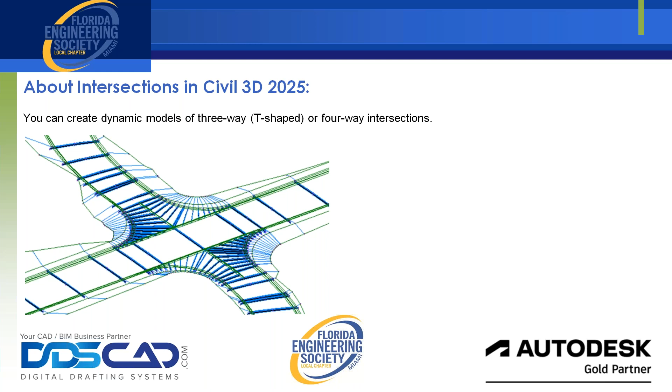Today we're going to be talking about creating intersections in Civil 3D 2025. In Civil 3D, you can create dynamic models of 3-way T-shaped or 4-way intersections. In the simplest form, an intersection is created by selecting the location where 2 alignments intersect. It creates an intersection object in the drawing, and this intersection object is displayed in the Prospector tab of your Toolspace.

Another approach to creating intersections is to first create your roadway alignments, then your offset alignments, and then the associated profiles. Once these preliminary design items are in place, you can create an intersection object that utilizes the 3D aspects of these roadway design geometry components.

Intersections are created and are based on existing Autodesk Civil 3D objects, which include your alignments, the horizontal piece. That's used by the intersection to define the center lines of the 2 roads that intersect. There are 3 types of alignments that we can use: centerline alignments, offset alignments, and curb return alignments. The centerline and offset alignments are used to define the horizontal geometry of our intersection object.

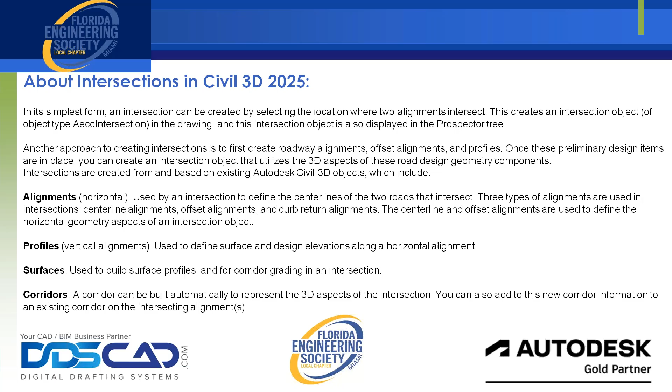Our profiles, which are our vertical alignments, are used to define the surface and the elevations along the horizontal alignment. Surfaces are used to build the surface profiles and then are used for the corridor grading of the intersection. And then corridors: a corridor can be built to represent the 3D aspects of the intersection. You can either build this corridor as an individual object, or you can add it to an existing corridor that may already exist in your drawing.

Now, assemblies. The roadway assemblies are required to build that corridor. You can build the assemblies ahead of time, and you have to build these assemblies based upon parameters that the intersection wizard we're going to be using today requires. Once you have built those assemblies and applied them, you can also save them and build something called an assembly set, so you can use those predefined assemblies over and over again in other drawings.

Both the assembly sets and the assemblies, of course, are made from the subassemblies that are part of the Civil 3D application, which you put together to define the geometry of the corridor section.

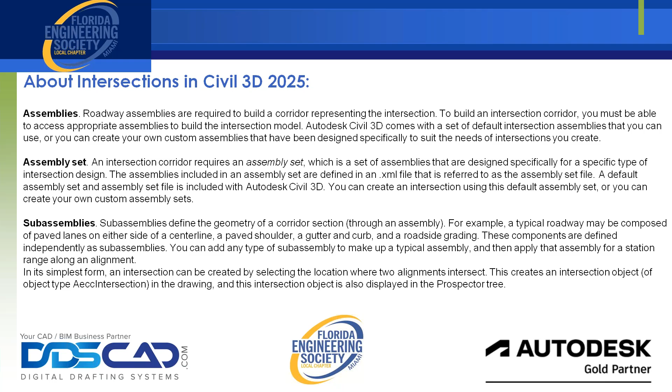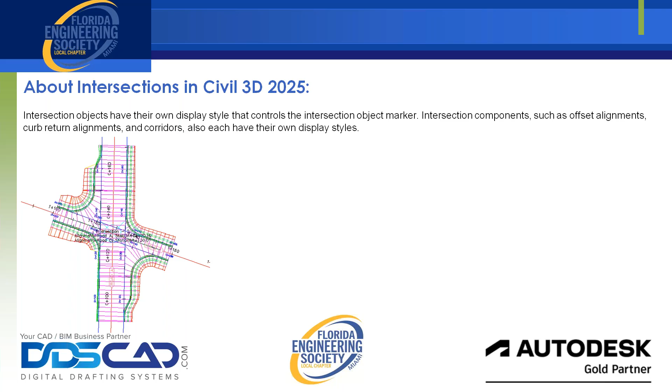Intersection objects have their own display styles that control the intersection object marker and the intersection components, such as your offset alignments, your curb return alignments, and the corridors. And they all have their own display styles. If we know anything about Civil 3D, everything in Civil 3D has a display style that controls how it looks in the drawing.

Now, intersecting alignments collection in the Prospector tab. After you create an intersection, in the Prospector tab you're going to have a section called intersection alignments. You can expand that out and see what alignments were used to create the intersection. You also can select an alignment, right-click, and use this command here

called Explore in Prospector. That command is just a shortcut. When you pick it, it takes you back up to the alignments collection in your Prospector tab underneath your Toolspace. Then you can make whatever changes you want to that particular alignment. So it's just a tool that helps you go from one place to another in your Prospector tab in your Toolspace.

Now, once you create an intersection, it's a new Civil 3D object. In the Prospector tab there's now going to be an intersection collection, so you go to that collection to access the intersection objects in the drawing. As intersection objects are created, they are displayed in the intersection collection.

When you expand that collection, you can view the names of the intersection objects in the drawing, and when you expand it again, you can display the intersecting alignments collection, or the intersection quadrant collection. Either of these collections can be used to display a tabular list of the components in the Prospector list view. If you remember, in the Prospector tab, when you pick on something, in the lower left-hand corner there's the Prospector list view that shows different things under that particular collection.

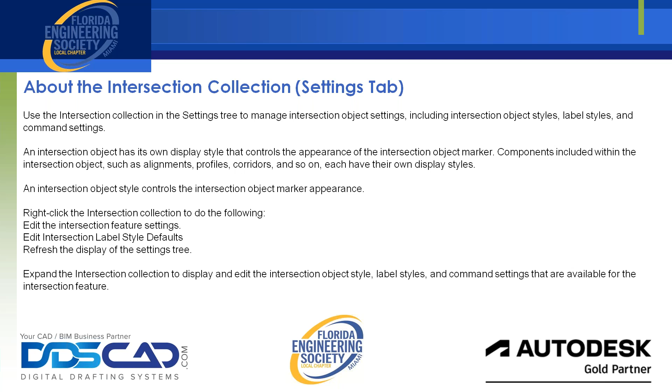If you right-click on the intersection collection, you can edit the intersection feature settings, or you can edit the intersection label style defaults. This is very similar to how all the other collections work. You always can get into feature or label style settings, and you can also always refresh the display style. It's just a new collection in your Settings tab.

Now, the intersection quadrants collection in the Prospector tab. We use the intersection quadrants collection to access details about the quadrants that are created when we create the intersections contained in the intersection object. We expand that out to view the names of the quadrants included in the intersection. If it's a T intersection, it's going to have 2 quadrants. If it's a 4-way intersection, it's going to have 4 quadrants.

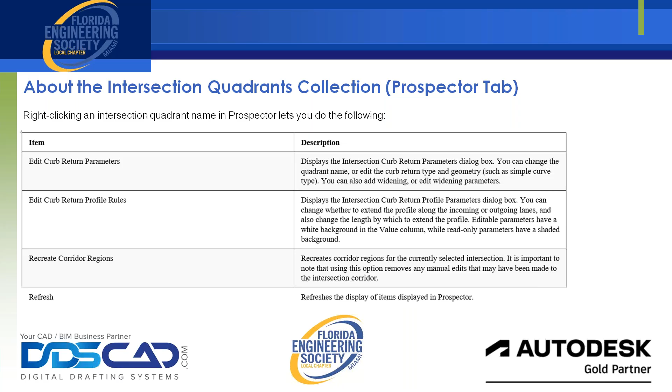This collection displays the names of the curb return alignments in each quadrant. You also can use it to display the names of the incoming and outgoing lane centerlines in the Prospector list view. The list view also displays the value of the intersecting angle between the incoming and outgoing lane centerlines. When you right-click on a quadrant name, you can edit the curb returns, edit the curb return profiles, recreate the corridor regions, or refresh the list.

Now, a couple quick things about deleting intersections. You can delete an intersection object by erasing it from the drawing, which removes it from the intersection collection in the Prospector. When you delete an intersection object, the following things are deleted: the intersection object and its label are removed from the drawing, and the intersection is removed from the intersection collection in the Prospector.

The following components associated with the intersection object are not deleted when you delete the intersection object: the 2D geometry components, which could be the intersection alignments, the offset alignments, and the curb return alignments, and the other associated components, the offset profiles and the curb return profiles.

If you create a new corridor object inside that intersection area when you create that intersection, this corridor object is not deleted when you delete the intersection object from the drawing. You just have to go back and delete the corridor object manually if you want to delete it.

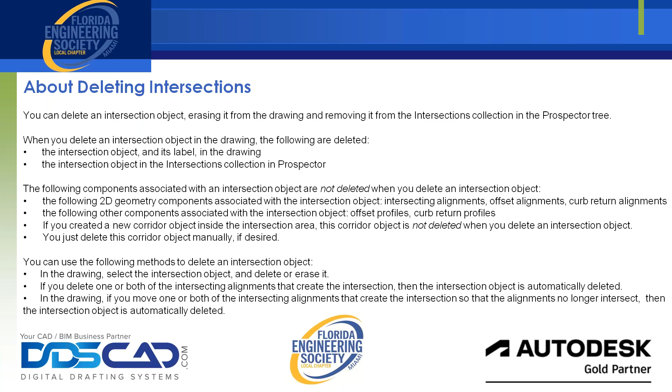You can also use the following methods to delete an intersection object. In the drawing, you select the intersection object and delete it or erase it. If you delete one or both of the intersecting alignments that create the intersection, then that intersection object is automatically deleted. In the drawing, if you move one or both of the intersecting alignments that create the intersection so the alignments no longer intersect, then the intersection object is automatically deleted. These are things that are very important when you're working with intersections after you create them.

Okay. Now, also deleting intersection object dependent components. What happens when you do those? Centerline profiles. If any of the centerline profiles associated with the intersection are deleted, then the curb returns become static. That means they're no longer dynamic and they won't update if you move things around. Accordingly, the intersection corridors will be updated.

Now, the offset alignments. If an offset alignment associated with the intersection object is deleted, that offset alignment has a curb return alignment attached to it. The curb return alignment attached to that offset alignment is not deleted. However, the curb return alignment is no longer dynamic to the intersection object. It becomes static, meaning if you make an update or move it, it will not dynamically update.

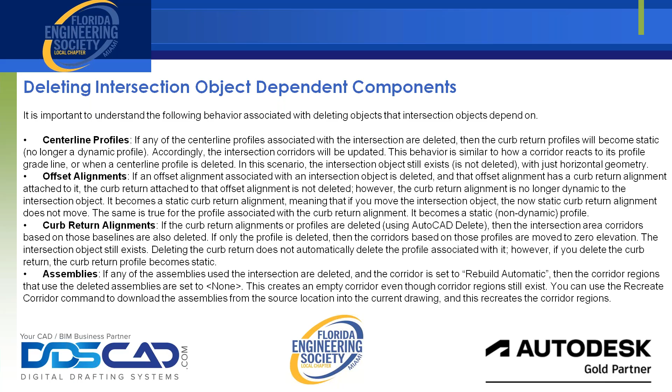Your assemblies. If any of the assemblies that are used in the intersection are deleted and the corridor is set to rebuild automatic, then the corridor regions that use the deleted assemblies are set to none. This creates an empty corridor, even though the corridor regions still exist in the drawing. Then you can go back and use a command called recreate corridor to download the assemblies or pick the assemblies from the existing drawing and rebuild that corridor region. And we'll go through one of those here in a little bit.

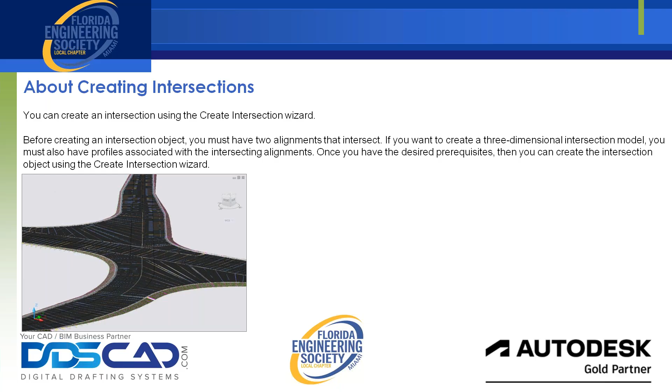All right. So now, creating an intersection. You can create an intersection using the Create Intersection Wizard. Before creating an intersection object, you have to have two alignments that intersect. If you want to create a three-dimensional intersection model, you must also have the profiles associated with the intersecting alignments. Once you have the desired prerequisites, you can create the intersection using the Create Intersection Wizard. You know how Autodesk is, they love their wizards.

Now, to create a simple 2D intersection: when an intersection object is created, a variety of tasks can be performed automatically, including the following. It will create your offset alignments for the roads included in the intersection. It'll create the curb return alignments in the intersection. It'll create the profiles for the offset alignments and the curb return alignments that were created when the intersection was created.

Now, there's a note. An exception to this is that if you set predefined static alignments as offsets, it's expected you have to specify the profiles. No dynamic offset profiles will be created. So that's a little rule. Or creating a new corridor region from the existing corridor in the intersection area, or creating new corridor objects in the intersection area. Now, what it does is it locks the profile elevations of the secondary road to the main road, which we call the primary road profile. Some of the tasks are optional. They depend on the options that we select in the Create Intersection Wizard.

The simplest way to create a basic two-dimensional object is to start with two alignments that intersect each other only once. You cannot use the Create Intersection Wizard if the alignments do not intersect. If your drawing has two intersecting alignments that meet this criteria, you can then create a basic 2D intersection using the Create Intersection Wizard. You simply start the command, follow the prompts, and accept the default choices. And we'll be going through all that in just a few minutes.

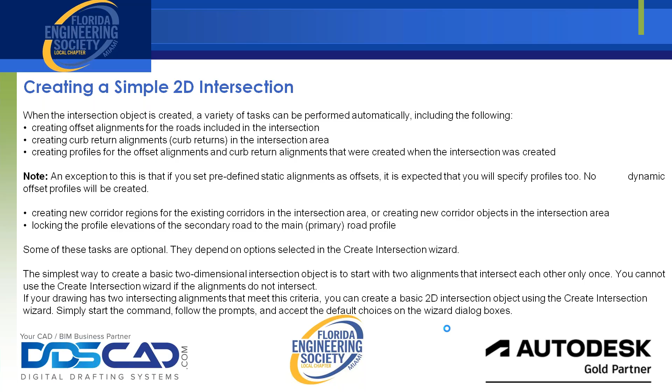All right. Now, creating a 3D intersection with corridor objects with alignments and profiles. To create a 3D intersection that includes a corridor, you first need to create your road geometry, your center lines and your alignments, your profiles, and an existing ground surface in your drawing. Once you have those, you can proceed with the Create Intersection Wizard tool. All right.

The wizard prompts you to select the location in the drawing where the two road center lines intersect. Okay. Now, you can start with the following data combinations: two intersecting center line alignments, or two intersecting center alignments with one or more road edge offset alignments, or their profiles. You can have the profiles defined already or not.

If the profiles are not available, then the features that are associated with the 3D model will not be available in the wizard. So in other words, if you don't have certain conditions, certain things won't show up in the wizard. Okay. Now, with any of the scenarios we've just described, you can start the Create Intersection command, select the point where the center lines intersect, and then proceed with creating an intersection, using the wizard.

Now, when you've got the wizard running, basically the first screen that you come to is going to tell you your road alignments. So it says that if you're creating a T-shaped intersection, which is a three-way, then the alignment that passes through the intersection completely is automatically specified as the primary road. All right. So in this situation, the primary road is going to be set to have a value of 1, and you're not prompted to specify which road is the primary road because it happens automatically. And this becomes important when we get into creating a different type of intersection.

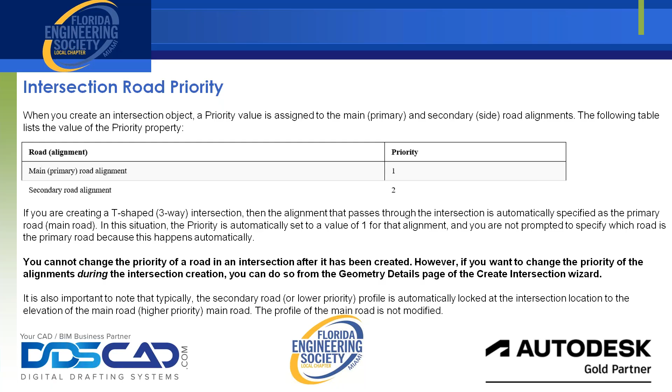Okay. Now, you cannot change the priority of a road of an intersection after it's been created. However, if you want to change the priority of the alignments during the intersection creation, you can do it from the geometry details page. Now, I don't know if I've ever done that before, and I don't think I've ever had anybody call me, but they say that you can do it. It is also important to note that typically the secondary road profile is automatically locked at the intersection location to the elevation of the main road. Okay, so the profile of the main road is not modified.

All right, intersection grading options. All right, you have two options in here. So the intersection corridor type property determines the type of grading that will be applied to the intersections. We have two types: primary road crown maintained, or all crowns maintained. And you've got to specify one or the other when you're creating your intersection. Okay, and it's going to be in the general page of the intersection wizard. All right, for an existing intersection, the intersection corridor type is displayed on the intersection details of the intersection properties box. Okay, in the intersection quadrant section.

Okay, now once this intersection is created, you cannot change the value of the intersection corridor type. If you want to change this option after you've created the intersection, you've got to delete the intersection object and then create a new one with the desired intersection corridor type. And that's why I went through the deletion part first.

Now, this is a little graphic. So in this type of intersection, we're doing a primary road crown maintained. All right. The crown of the primary road is maintained while the crown profile of the secondary road is adjusted to match the edge of the primary road and the intersection point. Okay. The crown profile and edges of the primary road are not affected. When you pick on this, the little graphic in the wizard is going to show like you're seeing right here.

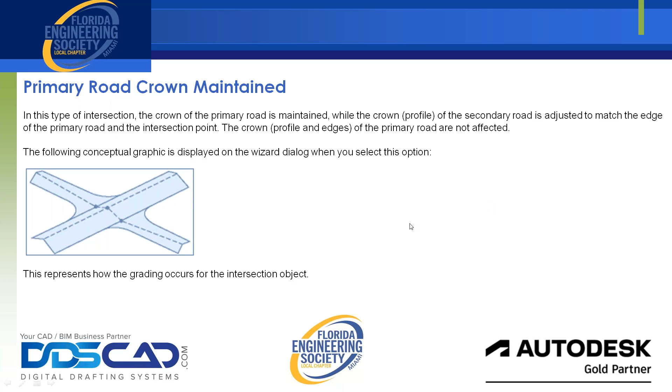All right. Now, a couple things to consider when you create an intersection. It's important to understand the following before you begin creating your first intersection. Use the Create Intersection wizard. You can create an intersection object that contains up to 4 quadrants. If the default intersection assembly mapping and the target assembly does not meet your design requirements, you create an intersection using these components and then edit the intersection regions manually to satisfy your design requirements.

Just like creating a corridor model. If you're creating a corridor model, you can go back into the corridor properties and change the values of the different things that you're using. If you create an intersection and then manually edit the intersection corridor regions, the changes will be overwritten if the intersection is regenerated by using the Regenerate Corridor Regions tool or by rebuilding the intersection. That's an important thing. If you make changes and you rebuild it or you recreate it, those changes are going to be lost. And we're going to do an example of that, the last thing we do today.

When creating an intersection, targeting both horizontally and vertically is done for you automatically. If you want to change the targets, you must manually modify the intersection corridor regions using the corridor properties dialog box.

So typically, after an intersection is created, the following objects are automatically added to the current drawing: your intersection object, a corridor if you selected it to do that, an assembly, your sub-assemblies, your offset alignments, any curb return alignments. However, the assemblies, the sub-assemblies, the corridors, the profiles are only added if the appropriate options are selected. Now, we're talking about assemblies being added. That's if you're using something that we're going to talk about here in a minute called an assembly set.

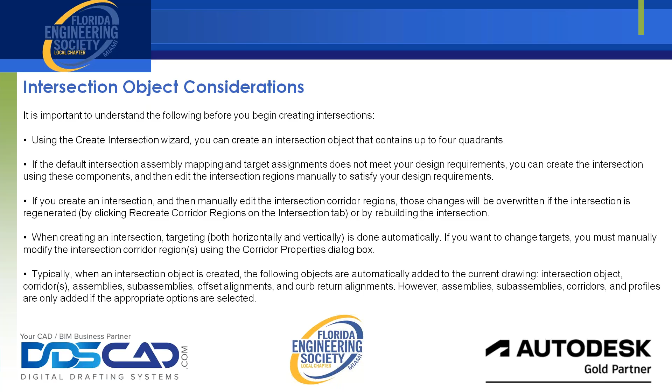So to create an intersection, we go to the Home tab. Then we go to the Create Design panel and we pick on Intersections and we pick on Create Intersection. The first thing it's going to do is ask you to select a point where the intersection happens. Now, if you wish to create a three-way intersection, it's important that the alignments meet precisely. They do not overlap, and they don't undershoot.

If the two alignments overlap, then it's by default going to create a four-way intersection. If you're creating a four-way intersection, you're going to be prompted to select the alignment that's going to be defined as a primary road, and you just pick it in the drawing. If you're creating a T-shaped, then the alignment that passes through that intersection is automatically specified as the primary road. Now, on the General page of the wizard, you can enter a name for the intersection object, or you accept the default. You can also add a description, or you can change the defaults for the marker style, the layer, and the labels.

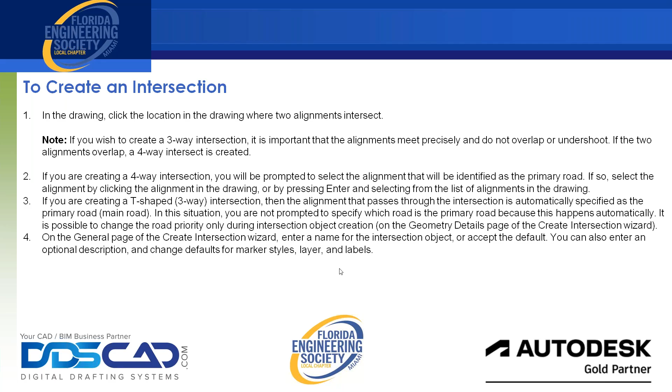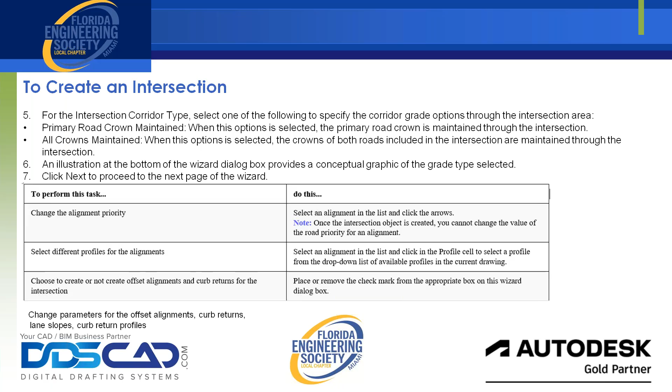Now, for the intersection corridor type, you've got to select either primary road crown maintained or all crowns maintained. Then you also have some other things that you can do in there. You can basically tell it to create or not to create offset or curb returns. And you can also go in and change the parameters for your offset alignments, your curb returns, your lane slopes, and your curb return profiles. And we're going to do all this in just a couple minutes. Then you hit Next, and by default, the new offset alignments are going to be created. So we click Next to proceed to the next page in the wizard.

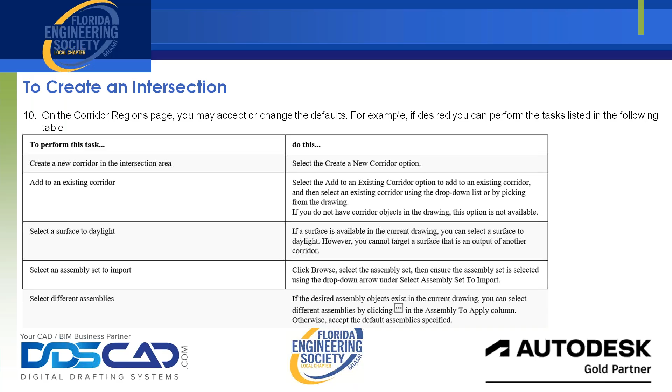Then we get to the page that says, how do you want to create this intersection? Do you want to create a new corridor in the intersection area? If you do, you have to check a box to do that. Then it's going to ask you, do you want to create a new corridor, or do you want to add it to an existing corridor? And then it's going to ask you for the surface to daylight, because remember, that's one of the requirements to use the intersection wizard. Then we're going to select an assembly to import, and that could be an assembly that's already existing in the drawing, or we can select an assembly set to import. And we'll do all this in just a couple of minutes. Once you've got everything applied correctly, you hit Create Intersection, and your intersection is now created. So we're going to start out here by creating something called a peer road intersection.

So we're going to create a three-way intersection and generate a corridor that maintains the crowns of both roads. To create a complete intersection model, we have to have a centerline alignment and a profile for each of the intersecting roads. Both the horizontal and vertical geometry for the remaining elements, including the offsets and the curve returns, are going to be generated by the parameters that we specify. So in a peer road intersection, the crowns of all the intersecting roads are held at a common grade. The pavement for both roads is blended into the curb return region, which forms the transitions between the intersecting roads.

So the drawing that we're going to work with contains a corridor along each of the intersecting roads. Each corridor is made up of a corridor assembly and a corridor centerline. Now, at the end of this example, we're going to have created a new intersection object, two curb return alignments and their profiles, four offset alignments and their profiles, several new corridor regions, and some corridor assemblies for each region of that intersection.

So let's jump over to Civil 3D. So here's our first example. Well, that was all right. Now, first off, I'm going to go over here in my Prospector tab, my tool space, and I'm going to expand out my alignment, and you're going to see that I have 2 alignments. So I'm going to select on First Street, and I'm going to say select. So this area over here is for my First Street alignment.

All right. I'm going to select my Second Street alignment. There's my Second Street alignment. Now, if I expand out First Street, you'll see that I have my design profiles created, and the same thing for Second Street. I should have my design profiles. So that means I've got some of the conditions met. I've got my alignments and I've got my profiles.

Okay. Now, if I slide down in here and I look under my corridors, you'll see that I have 2 corridors, First Street and Second Street. So I pick on my First Street corridor and hit select. You'll see that there's my First Street corridor. If I go down here and pick on Second Street, you'll see that here's where my Second Street corridor is located. All right. So I have some existing corridors in the drawing.

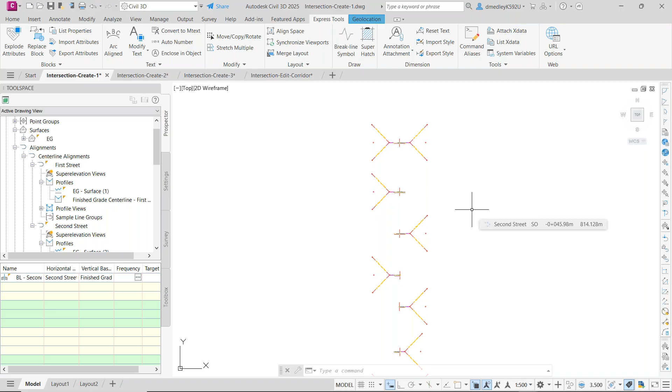And if I go up here and I look at my surface, you'll see that I have a surface in the drawing. And it's currently not displayed, but I do have a surface available. Now, if I pan over, you'll see that I have some assemblies that have already been built in the drawing. And I can elect to use those or not to use them. And each one of these assemblies is going to match a condition that's required by the intersection wizard. Okay. And then you'll see that I have 2 profile views with, again, my associated profiles.

Now, I'm going to zoom in here. Now, here's a little tip about when you're working with the intersection wizard. The intersection wizard can be a little finicky sometimes. And sometimes when you go to select where your intersection is going to be, it can't find that intersection. And so what I tell people to start out with is go down to their status bar and make sure that you don't have your running OSNAP turned on. And I'm going to turn, for this example, my dynamic input.

Now, what I'm going to do is I'm going to select on these 2 alignments. Okay, and I'm going to right click and I'm going to pick on the display order and I'm going to bring them to the front, bring them all to the top of the display list, and that just helps the intersection wizard select that intersection. Okay, so let's get started. Home tab, create design, intersection, create an intersection.

And you notice now that even though I had my running OSNAP turned off, the software turns on my intersection snap, and I'm going to zoom in and pull right into here, find that intersection. And if it finds the intersection, when I pick with my left mouse button, it will bring up the create intersection dialog box, which again is made up of general, geometry, pages, and corridor regions. Okay, so to start out, the intersection name, we're going to use the default parameters. So it's going to be called, in our case, primary alignment name, secondary alignment names.

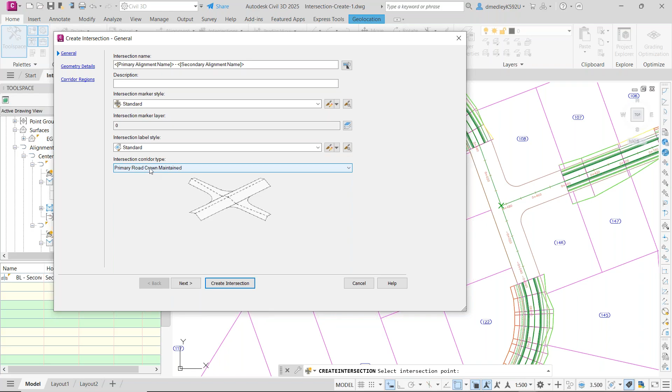My primary alignment was going to be, because this alignment went all the way through the intersection, so it's going to be 2nd Street dash 1st Street. And I'm going to leave my intersection marker, layer, and label style as the defaults. And my intersection corridor type, you can see right now it's set at primary road crown maintained. And you see the graphic. I'm going to change that to all crowns maintained. Okay, you see the graphics change. I'm going to hit next.

All right, now you'll see up here at the top, it tells me the priorities of the 2 alignments. Okay, now offset and curb returns and offset and curb return profiles. I want to have these 3 boxes checked so it creates and allows me to specify my offset alignments. It creates my curb return alignments, and it creates my offset and curb return profiles. So we're going to start out by going to the offset parameters first.

All right, so for this example, our primary road, all right, when I select, it's highlighted, and so the offset value is 3.5 meters for both the left and the right side. And this data set is a metric data set that I'm using today.

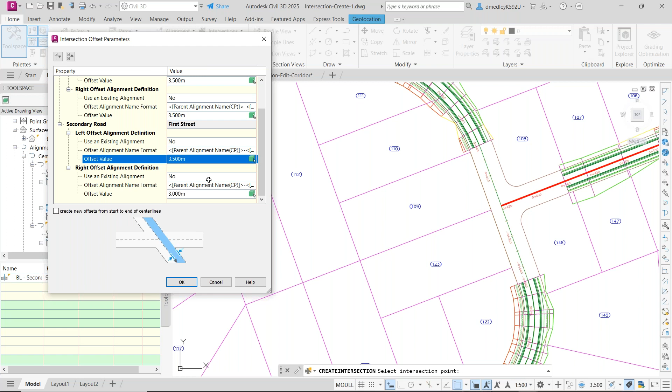Okay, so what I'm going to do is I'm going to change the offset value for my secondary roads. So I'm going to change the offset value for the left side to 3.5, and I'm going to change the offset value for the right side. And as you notice, as I check in the box, my graphic changes to show me what side of the road that I'm working on. Okay, so I've set my offset value for my offset this is going to create. So I'm going to hit OK.

Now I'm going to go to my curve return parameters. Okay, now in this example, because it's a T intersection, I'm going to have 2 quadrants, my northeastern quadrant, and I'm going to have my southeastern quadrant. So what I'm going to do is I'm going to change the radius for my northeastern quadrant to 7.5. Okay, now I could hit next and go down here and change that value again.

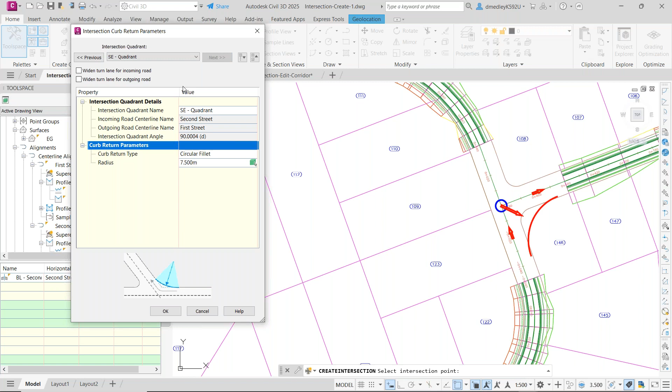But here's a little tip. I'm going to go back to previous, and I'm going to select on the curve return parameters. And just like any good command in Civil 3D, and everybody that I teach learns this one phrase: when in doubt, right click. So I'm going to right click, and I'm going to say copy these to all quadrants. So that value is now copied to the southeastern quadrant. Right. So that's all I'm going to do. I'm just going to change the radius for those 2 quadrants.

Okay. All right, now I'm going to go down and look at my lane slope parameters. So for both the primary road and the secondary road, I'm just going to do a crossfall across the center line of minus 2%. I'm going to leave the defaults. Okay, and then for my curve return profiles parameters, when I look at that, I'm going to leave the defaults. But what we're really looking at right here is that we've got a length to extend along the incoming lane.

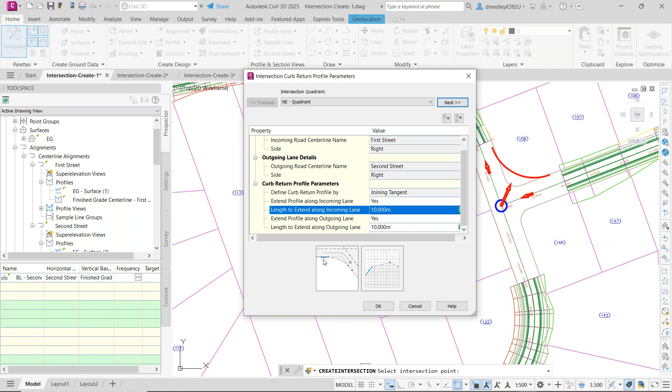So my incoming lane coming in is going to be this area right here. It's going to be 10 meters, and my length to extend my outgoing lane, my default is set at 10 meters. Okay, for both quadrants. So I'm going to set that as okay. All right, now I'm going to hit next. All right, so now this brings us to where things happen.

So first off, in the corridor regions page, create corridors in the intersection area. All right, now my option is, do I want to create a corridor? If I uncheck that, it's going to create the intersection and the intersection object, but it's not going to create a corridor. For this example, I want to create a corridor, but I want to add it to an existing corridor. So I'm going to change to add to existing corridor.

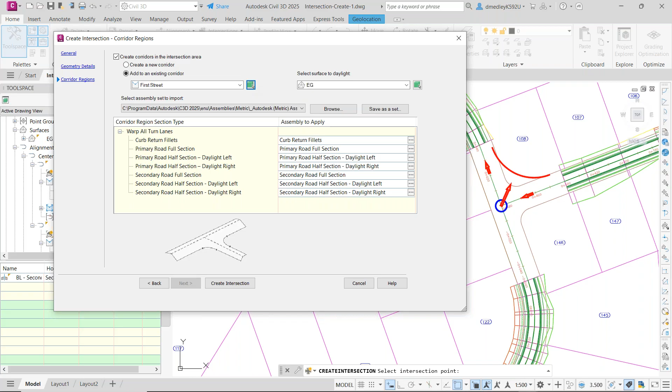Now, I can pick from the list, or I can pick the graphic, this little icon right here. When I do that, I'm just going to go over and pick on that First Street corridor, and that'll select it as my corridor. So either I can pick it from the list or I can pick it from the screen. Because my surface isn't displayed, I have to pick it from the list.

Now, down here under the corridor region type, basically you've got different parameters that have to be. Your corridor, your curve return fillets, your primary road section. As I move through, you see the graphics change to tell me what we've got. Daylight right, full section for the secondary road, full section daylight right. And over here on this side, these are the assemblies. Now, right now in this drawing, I have some assemblies.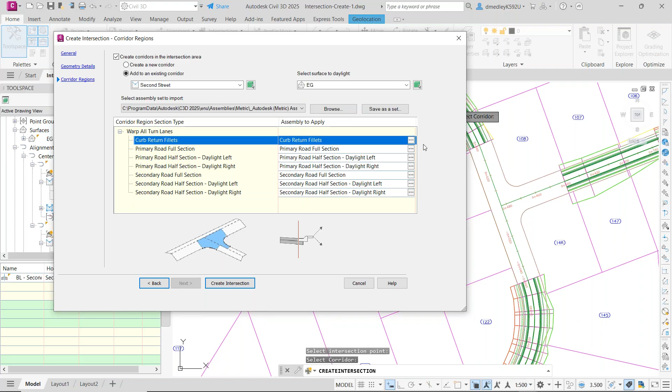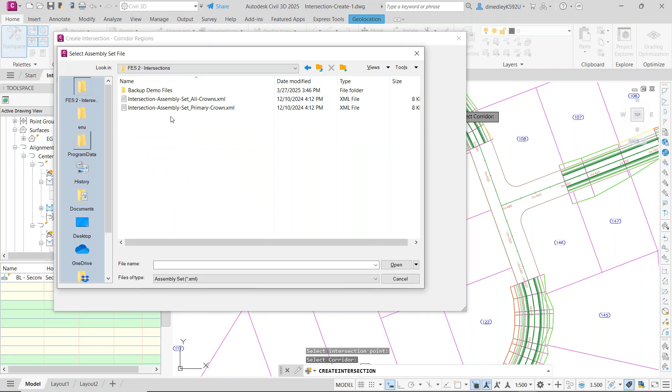So if I pick on the little box here under the curb return fillets, I pick here, and I pick the down arrow, I can pick from any assembly that I have in the drawing already, all right? But now for this example, I don't want to do that. I want to load up an assembly set, all right? So I go over here and I pick Browse. Now I'm going to go over here and find an assembly set that I want to use. And the assembly set that I want to use is called Intersection Assembly Set All Crowns.

Now this assembly set was created from a drawing. Somebody created the assemblies, and then when they were in this box, they picked on the option Save as a Set, and they saved it away, and it creates this XML file. Now, when I loaded it in, what you're seeing here now is it basically has applied those assemblies in the proper locations in the list. Okay, so once I've got these things in, I have no more gray buttons, and I'm going to create my intersection.

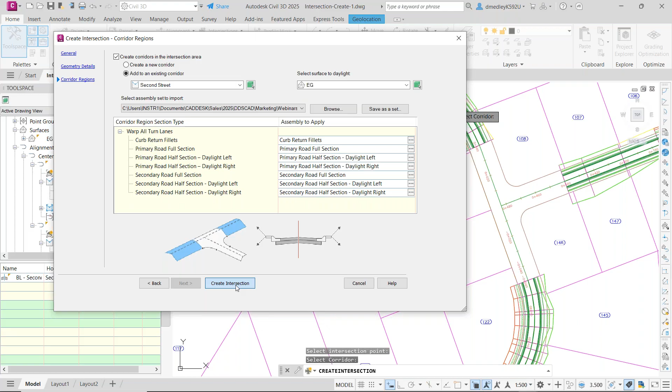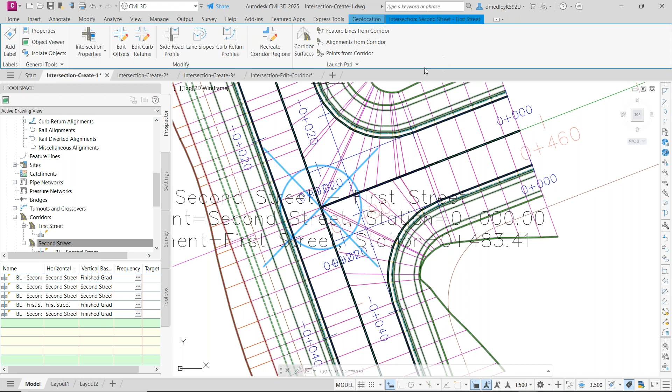And now you've created your first intersection. So if I zoom in, you'll see here that I have an intersection marker. If I pick on it, you'll see up here in the ribbon, I get a context-sensitive tab that says intersection, Second Street, First Street, and you'll see that here's all the things that I can go in and edit in that intersection. Okay, I'm gonna hit escape to release it.

Now, I'm gonna go out here and take a quick look to see what's been created. So under my alignments, I now have some offset alignments that it created automatically. So I've got my First Street left, First Street right, and if I expand those out, you'll see that it created the profile for me. Okay. If I go down here, I see it now created my curb returns for Second Street. If I expand those out, you'll see that it's created the profiles for me for both of those.

If I slide down in my Prospector, you'll see that my corridor is still there, but because I didn't create a new corridor, I added this intersection as a corridor to Second Street. All right, if I go down here, now I've got my intersection. If I expand out my intersection alignments, you'll see now that there's my Second Street. It tells me the alignments used for my intersection at First and Second Street, and then it tells me my quadrants that were created, the northeast and the southeast.

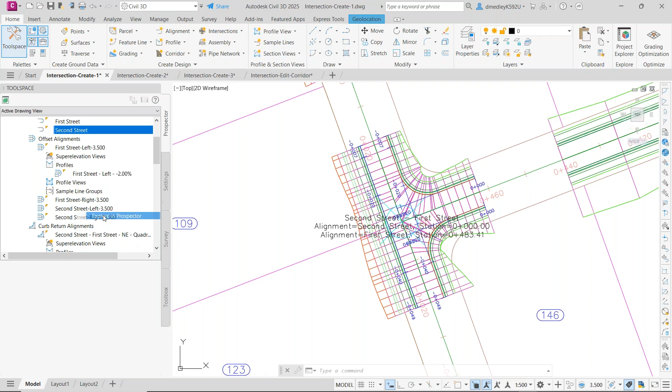And here's that little trick that they showed you. Under intersecting alignments, if I right click and say Explore in Prospector, it pops me back up in my list, and it takes me right to the alignment that I want to work with. Okay, so Second Street, right click, Explore in Prospector, and it took me right up in my Prospector, right to the alignment. Okay, so there you go. So that's what's created when you create an intersection object.

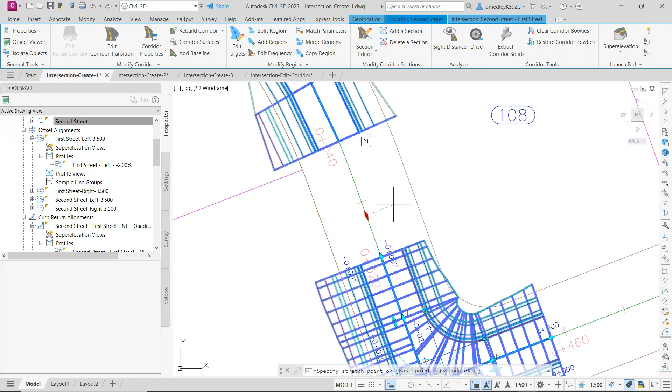Now we've got a little cleanup work to do. One of the things is that we have this gap right here. So I'm going to select on this corridor model, and I'm going to select on this grip. Now, in order for this to work, I have to have dynamic input turned on. So if I zoom in, you'll see I'm around 0+040, going down to 0+020. I'm going to move my cursor down and type in 21. And when I hit enter, it's going to move that marker down to station 21.

Now, nothing happens. It's not very impressive. It's because the corridor is set up not to automatically rebuild. We'll fix that in a second. All right, let's move down here and do it a different way. Now, you'll notice that when I have the corridor selected, my ribbon has an intersection tab, for working on the actual intersection components, or I go to the corridor tab and I'm looking at the things that make up the corridor.

Now, what I'm going to do is go to the Corridor Second Street tab, Modify Region, Copy Region, and I'm going to select right down here in this region. All right, now I'm presented with some options at my command line: Fill or Baseline. I want to use the Fill option, so I can either type in the letter F and hit enter, pick on the word Fill at the command line, or when in doubt, right click and pick Fill.

Now when I move my cursor into that gap, it's going to present me with this red line. It says, this is the area that I'm going to fill. Is this what you want? Yes, it is. And I'm going to pick. And there we go. So it filled the gap. But now if I zoom out, I've still got this problem. This has not been filled in.

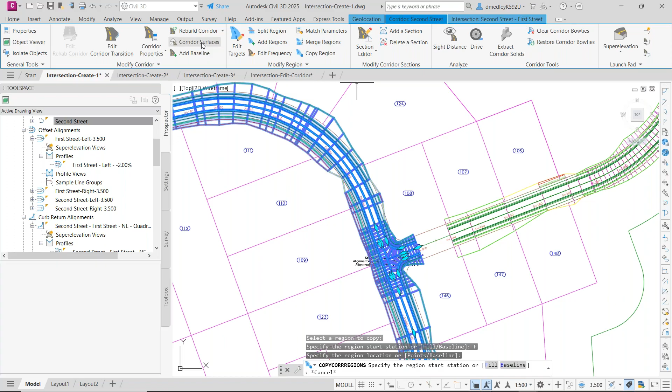Well, with the corridor still selected, and still in the Corridor Second Street tab, I go over here to Modify Corridor, Rebuild Corridor, and pick Rebuild Corridor, and it automatically rebuilds that region in places where I told it to extend when I moved that marker. Okay. All right, let me hit escape.

Let me zoom into here. I'm going to grab on the First Street corridor. I'm going to grab this marker, and I'm going to zoom in, and my running O-snap is still not set. So I'm going to do a shift right click to do a running O-snap, pick intersection, and I'm going to snap right on this intersection right here.

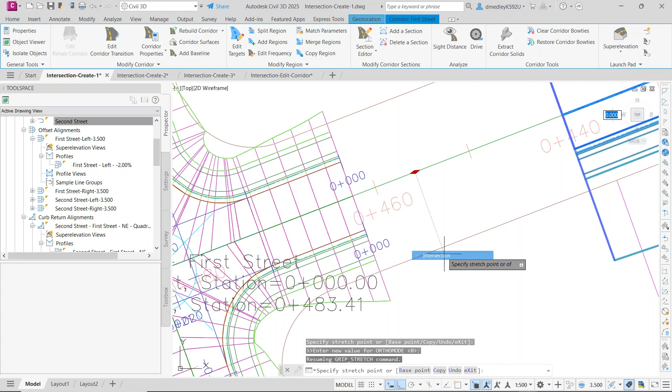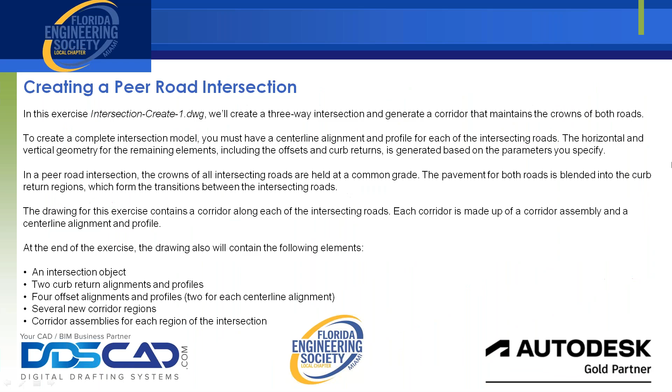And now I have dragged that region down and filled in the gap. So there you go. So that's how you would build a peer road intersection. All right. Now let's move over to creating a primary road with turn lanes. So one of the things that we can do with this intersection tool is we can create intersections with turn lanes. All right, so let's go back to the drawing.

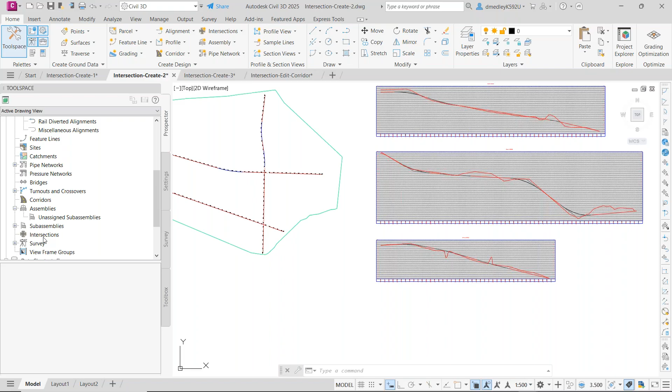Right? So in this drawing here, we've got 4 alignments, and all of them have profiles, because you can see the profiles. But in this drawing, there are no assemblies. You'll see if we slide down here in our prospector here, that there are no assemblies. And there is no intersection, and there are no corridors, okay?

So what we're going to do is we're going to zoom in on this area here. And again, I'm going to do that same little trick. I'm going to select the alignment. I'm going to right click, display order, bring to front, okay? All right, so home tab, create design. So again, we're creating a primary road intersection with turn lanes. So we go create design, intersection, create intersection, okay?

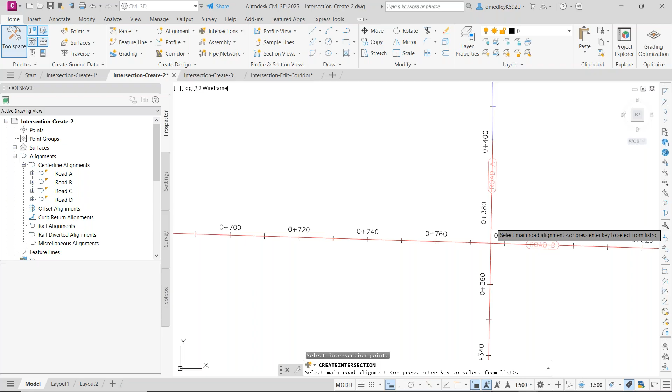I'm going to select my intersection point. Now it asks me to select the main road alignment. Now I either can pick it graphically on the screen, or I can pick it by selecting from the list, which is what I'm going to do. And now my wizard starts up. Now you notice the intersection name has changed. Now it's just an intersection, and it's just using a default counter. So whatever the next free counter is, whether it's 1, 2, or 3, that's what it's going to call it.

I'm not going to change any of the marker styles, but I am going to make sure that my intersection corridor type is primary road crown maintained. I'm going to hit next. Again, offset and curb returns, offset and curb return profiles. I want to make sure that all these things are selected and turned on. So I'm going to start out by setting my offset parameters. What I'm going to start out with first here is I'm going to change my primary road left and right alignments values from 3 meters to 6 meters. Okay, that's all I'm going to change.

Then I'm going to go down to my curb return parameters. Now, I've got 4 quadrants that I'm working with, and I'll just pick my little list so you can see 4 quadrants. So I'm going to start out in the northeast quadrant. Now I'm going to leave the radius set at 10 for this example. Now we're going to add a widening for a turn lane on all 4 of these conditions in these quadrants. So for the northeastern quadrant, I'm going to do an outgoing. So the outgoing turn lane is going to be here. So an outgoing lane. So I'm going to hit next.

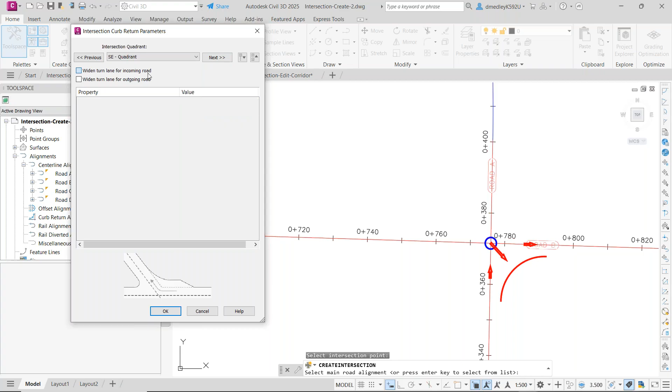All right, for the southeastern quadrant, I'm going to do an incoming. Hit next. For the southwestern quadrant, I'm going to do an outgoing. Hit next. And then for the northwestern quadrant, I'm going to do an incoming. All right, I'm going to hit OK. Now I'm going to leave all the values for the lane slope parameters, the curb return parameters set at the defaults. So I'm going to hit next.

Now, because I don't have a corridor in there, I have to create a new corridor. I'm going to make sure I've got my target, my existing ground. Now, for this example, I'm going to use an assembly set because there are no assemblies in this drawing. So I'm going to go to Browse. And this time, I'm going to pick an assembly set that comes with Civil 3D out of the box. So I'm going to go down to the folder called Program Data. So on your C drive, there's a folder called Program Data.

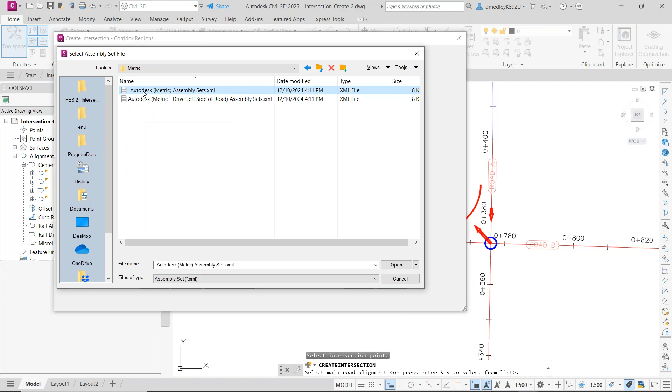You go to Autodesk. You go down and you pick on Civil 3D 2025. You pick on ENU. You pick on assemblies, and they give you 2 different assembly groupings, one for imperial units, the other one for metric units. I'm going to go to metric, and I'm going to pick on the underscore Autodesk metric assembly sets, and I'm going to pick open. And again, it just applies the assemblies to the proper conditions. Okay, and I'm going to hit create intersection.

Okay, so there you go. Now, I want you to notice here that the offset alignments only extend to the end of the condition of where this intersection is being created. Now, if I want these offset alignments to extend all the way to the beginning and the end of the alignment, when I was creating it, there was a box I could have picked to have it create the offset alignment from the start of the alignment to the end of the alignment.

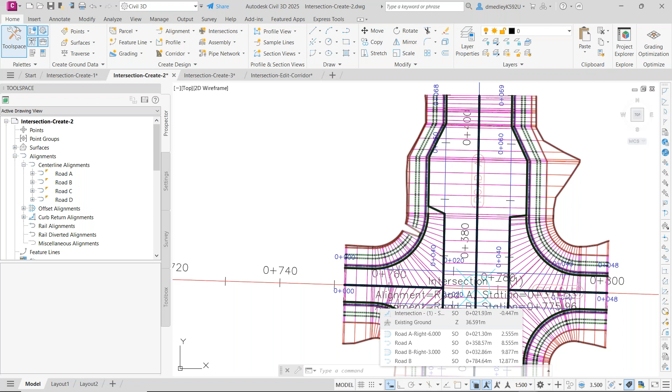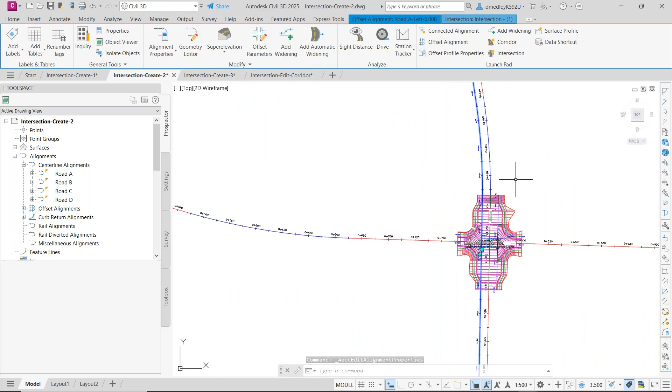Okay, so I'm going to show you how you could fix that. If I pick it, and I go up here to alignment properties, and I go over here to the offset parameters and the starting station, I'm just going to tell it to pick at the starting station, do the defaults, and hit OK. Now that alignment is going to start at the beginning and go to the end. And I'm going to do the same thing for this alignment right here.

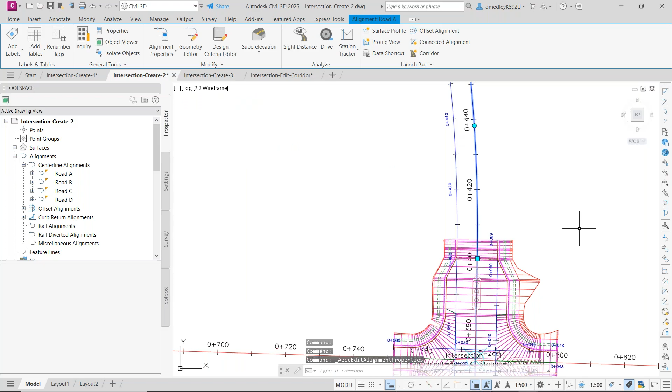So I'm going to select it, alignment properties, design criteria, sorry, wrong thing. Select it, alignment properties. Picked the wrong alignment. I need the offset alignment, not the actual alignment. All right, check it, hit OK. And now we'll see that that alignment starts, and it ends.

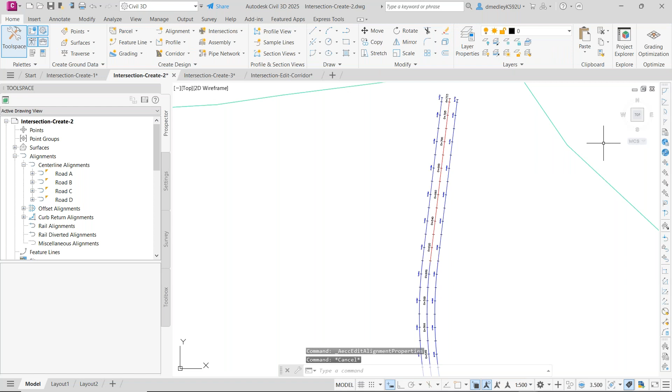So that's how you can fix a mistake. If you had meant to have done that when you were in the intersection wizard, that's how you can repair that problem. Okay, so there's how we created an intersection. And again, the same things happen. It's created the offset alignments, and it's created your curb return alignments. And it's created the new corridor, and it's created your new intersection.

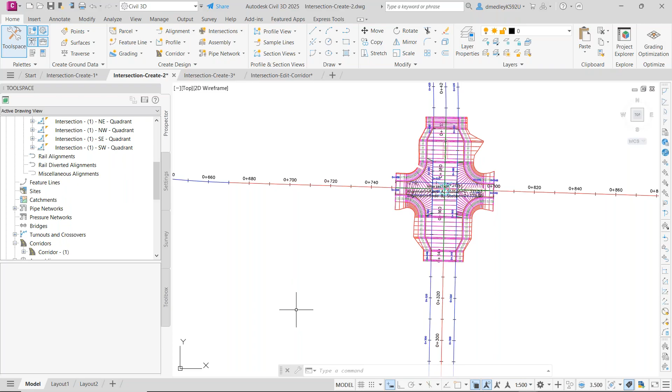And if I right click here and I say rebuild the corridor, it's going to update the intersection, and you'll notice now the corridor is also updated as well. So everything's good to go. Okay. Create an intersection with existing geometry.

So in this intersection exercise, we're going to use the existing offsets that we just created and the profiles of the roads to create the intersection and add the new intersection to an existing corridor. The workflow in this exercise is useful when you need to create several intersections along a single corridor. You define the offset geometry for the primary road, and then you can just reuse it for any additional intersections that you may need to create.

All right, so let's go over here. You'll notice that in this particular drawing you can see how we have our offset alignments. They're going from start to end, and basically it's the same intersection that we just did. So we're going to be working down here on this intersection. In this example, I'm not going to pull these to the front, and let's see what happens. Give me just a second here. So we're going to be creating an intersection with existing geometry.

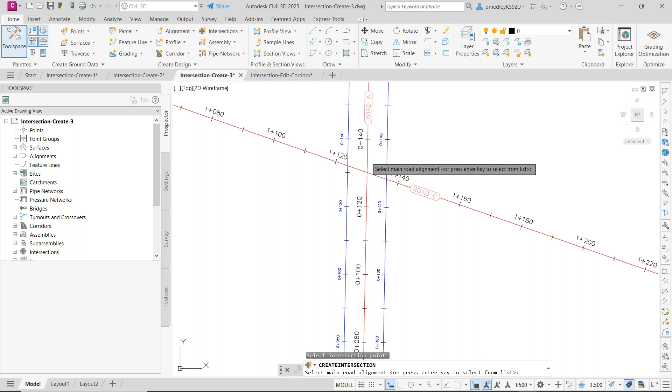So same thing, home tab, create design, intersection, create an intersection. We're going to select the intersection point. Because it's a four-way intersection, it's going to ask me to select the alignment. I'm going to pick on this alignment right here. When it comes up, I'm going to leave the defaults. Primary road crown maintain is what I want to use. I'm going to pick next.

Now my offset parameters. I'm going to select it, but this time I'm not going to create new offsets. I'm going to use the existing information. So for the primary road, where it says use the existing alignment, I'm going to say yes. And then under the alignment name, I'm going to pick the ellipsis box, and pick on the graphic so I can select it from the screen. I'm going to pick this alignment right here, and hit OK.

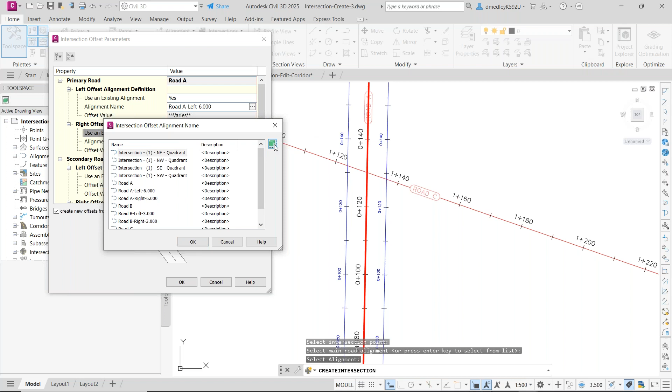And I'm going to repeat that for the right side. Pick it again. Pick the box. And I'm going to say right here. That looks good, so I'm going to hit OK. Now I've got to go down here and set my parameters for the vertical part of that. So for my curb return parameters.

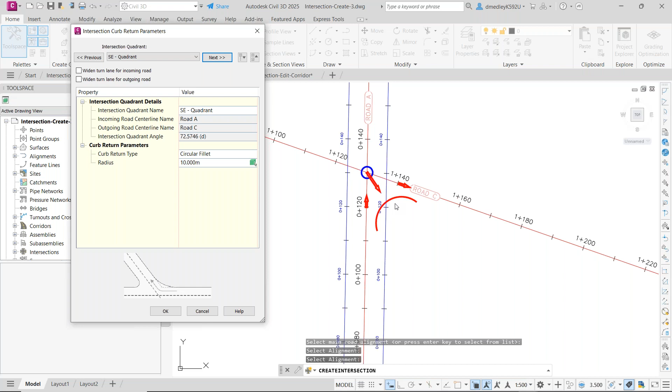Let's see. All right. I'm going to be working with two quadrants. I'm going to be working with the southwestern quadrant, okay? And on the southwestern quadrant, I'm going to be doing a widening for an incoming road. And then I'm going to move over here to my northwestern quadrant, and I'm going to do the same thing for an incoming road, okay?

All right, now I'm going to go down here to my lane slope parameters, okay? Now this is where I'm going to use the profiles that the software created previously for these two offsets. So I'm going to change it to yes, and I'm going to say profile name. Now, I'm going to go down here and look under road A, and I'm going to say road A minus 2%. That'd be for my left side.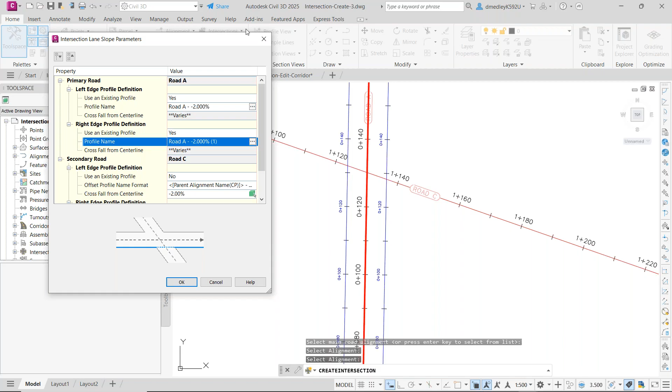And then for my right side, I'm going to say yes, and I'm going to say the profile name, road A minus 2%, left paren 1, right paren. It's just the way the software names it. So what I would recommend is if you create these things and you know you're going to use them over it, go into your Prospector tab and under those profiles give them a name that you can recognize what they are. Okay. All right, I'm going to hit OK.

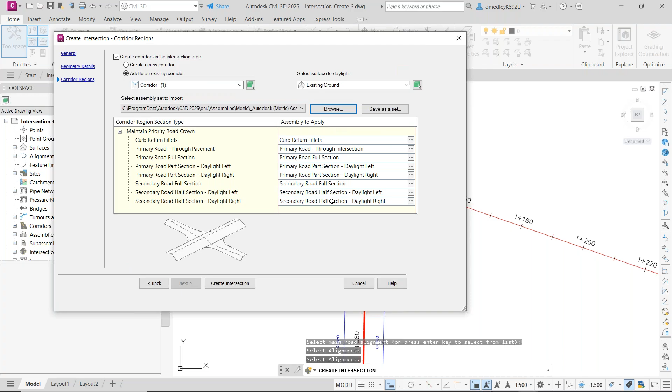So everything looks good. Curvature and parameters we'll leave the way they are. We're going to hit next. Now, we're going to add this to an existing corridor. And we only have one corridor in the drawing, corridor 1, existing ground. We're going to go to browse. We're going to use the same assembly that we used previously, this metric assembly. Okay, so it adds everything to the list properly. And I'm going to say create the intersection.

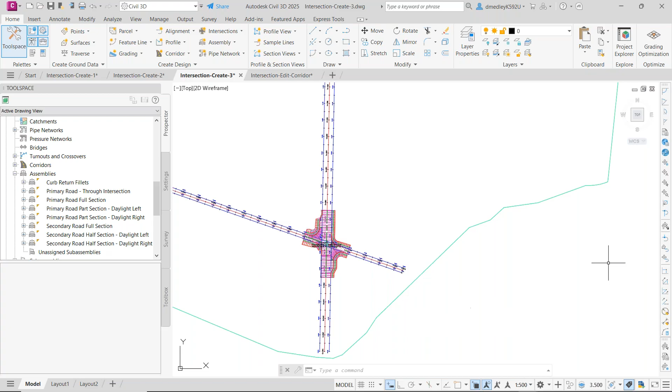And so there you go. So now here's your incoming turn lane here in this quadrant, and here's your incoming turn lane in this quadrant. Well, we go back here and we look now underneath our alignments. You'll see that we've got our offset alignments in here, and we've got our curb return alignments. If we slide down the list, you'll see that we've got our intersection in here. And if we looked here, you'll see that it's brought in all those assemblies from that XML file.

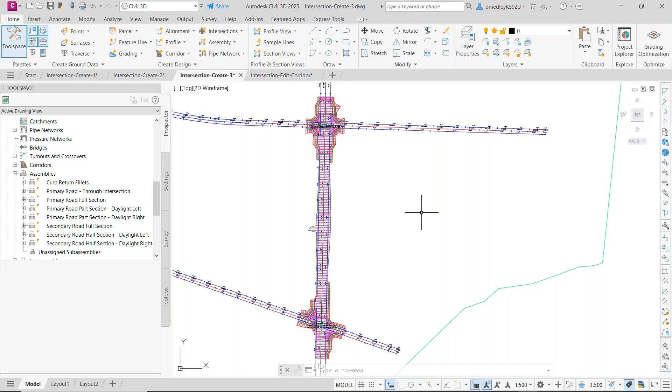Now, I'm going to select this corridor here, okay? And I'm going to go up here and do that copy region trick again. So it's modify region, copy region. I'm going to pick here. I'm going to right click and say fill. And I'm going to pick, and I've filled in the region. So there we go. So now we've created a new corridor using existing geometry, which in this case was those 2 offset alignments and the 2 profiles that were created for those offset alignments.

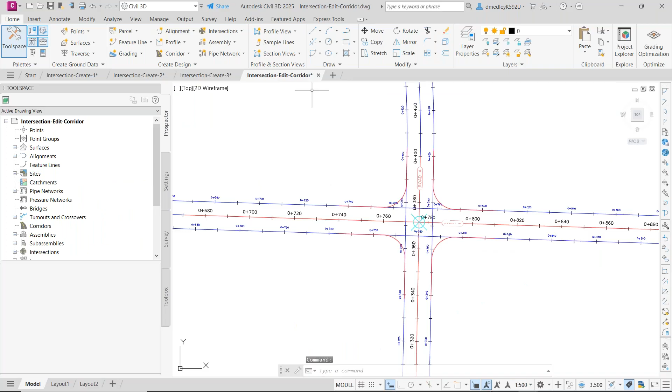Okay, the last thing that we're going to do here is creating and editing a corridor in the intersection area. In this exercise, we're going to create a corridor using existing vertical and horizontal geometry. And then we're going to modify the corridor in the intersection area and experiment with the corridor recreation tools. All right, so we're going to zoom in, and you can see that they have created an intersection without creating a corridor. So they didn't check that box in the wizard.

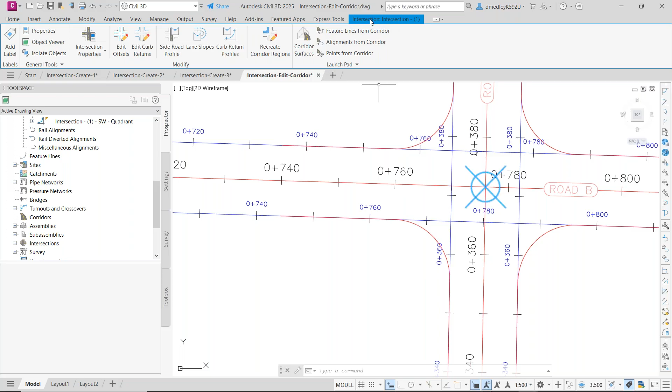So if I pick on that marker, you can see these are all the things that I can do. If I go over here and look under my alignments, you'll see that I've got my centerline alignments, my offset alignments, my curb return alignments, because even though it didn't create the corridor, it created all that information and the required profiles. Also in here, you'll see that we have no corridors right now because it was never created in this file. So with the intersection marker selected, looking at the Intersection 1 tab, we're going to go over to the Modify panel. We're going to pick on Recreate Corridor Regions.

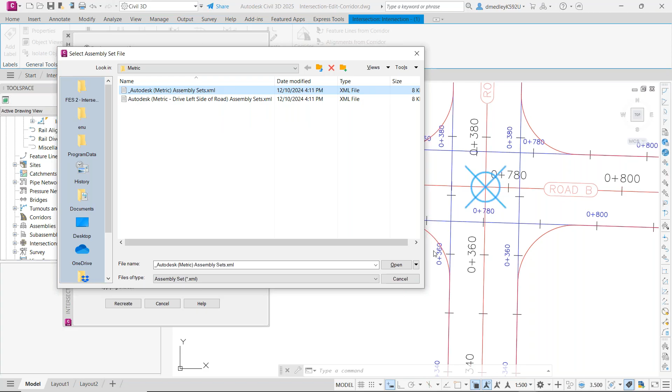Okay, and so we're going to create a new corridor, and we have to tell it the surface to daylight to. All right, and I'm going to pick the assembly set that I want to use. I'm going to use that metric assembly set again, and I'm going to hit open. Okay, and now I'm going to go here and pick recreate.

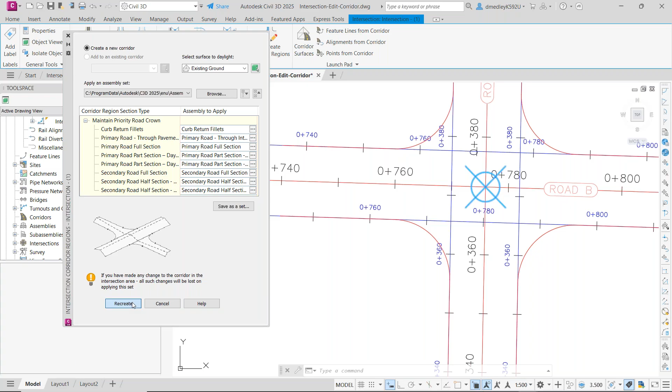Now, if in this file I had assemblies that I wanted to do, I could add those by picking in the ellipsis box and adding them in there. And then when I was done, I could pick save as a set, and that would create a new assembly set. So I'm going to pick recreate. And now it's created that intersection for us based upon the parameters that we specified.

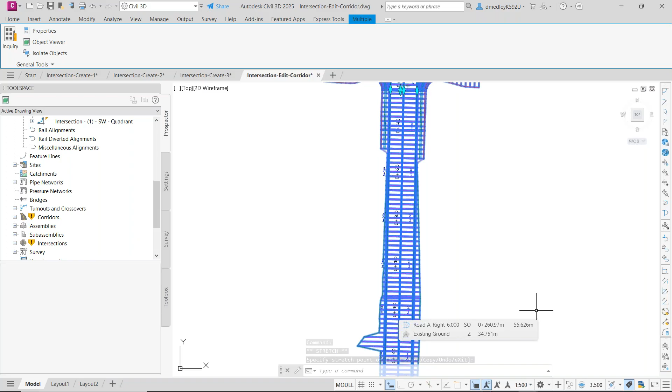Okay. Now I'm going to very quickly grab this right here, and I'm going to extend this down to around 220. And now the first thing I notice is that in my regions there, my tangent spacing is wrong. I want it to be bigger. So I'm going to hit escape. I'm going to select the corridor. I'm going to go up here to corridor properties.

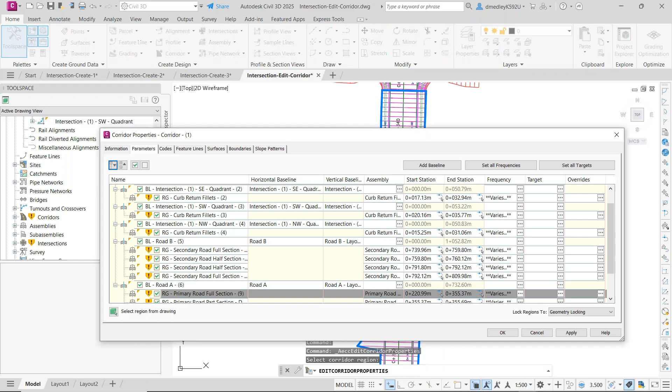Under the corridor tab, and under the parameters tab, I'm going to select that region from the drawing. And what I'm going to do is modify the frequencies. So along the tangents, I'm going to set that to 10, and along the curves can be set at an increment. The curve, I'm going to set that at 5.

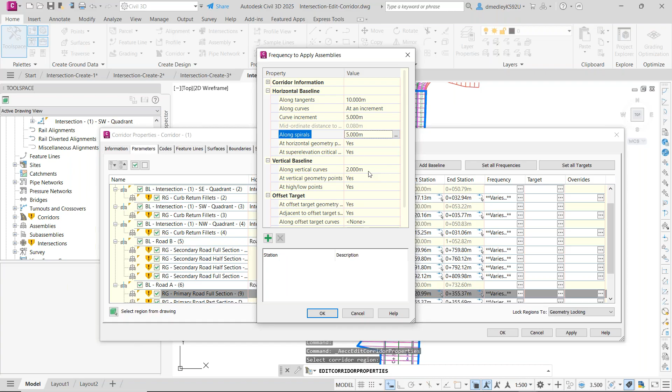Along spirals, and as you all know, when you're creating corridors, typically you set your curves and your spirals half of whatever your tangents are. And then for along my vertical curves, I'm going to set that at 5. Okay, and now I'm going to hit OK, and I'm going to rebuild the corridor

to apply those changes. So you can see now that my regions have been spaced out for my tangents, and if I pan up, you'll see that my spacing for my curves is set at about 5 meters. Now, you notice down here in my Prospector tab, my intersection is now saying it's out of date. If I right click on it and I say update region and rebuild corridor, I'm going to lose all my changes. Or if I pick recreate corridor regions, I'm going to lose all my changes.

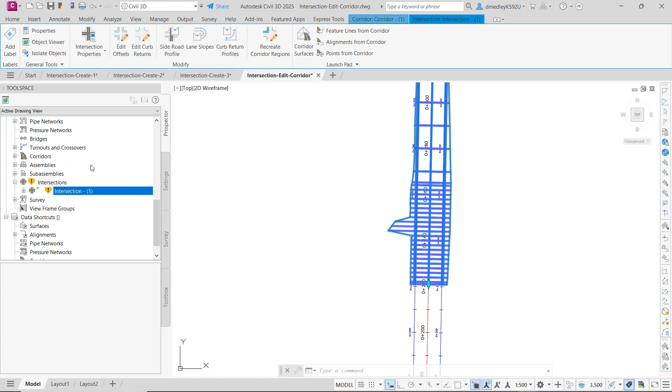Now, with my corridor still highlighted, there's a couple different ways to do it. I'm thinking here what's going to be probably the fastest way. Let's just go up here and pick under the intersections, and I'm just going to pick recreate corridor regions. That's the same as picking it from over there. Pick recreate corridor regions.

I'm just going to make sure that I have the right assembly set. I'm going to hit open, and I'm going to pick recreate. And you'll notice that all of a sudden everything disappears, everything goes back to the way it was. The reason is that the corridor was recreated using the parameters that were originally specified during the intersection creation process. So remember, any modifications that are made to the corridor in the intersection area are not retained when you recreate the corridor from an intersection object.

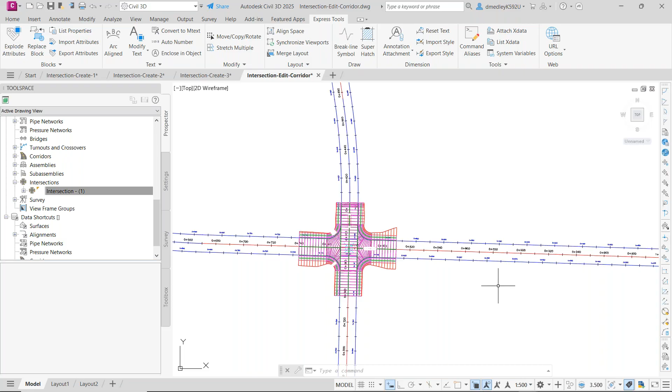Okay, so there we go. So those were the 4 examples that I wanted to show you.